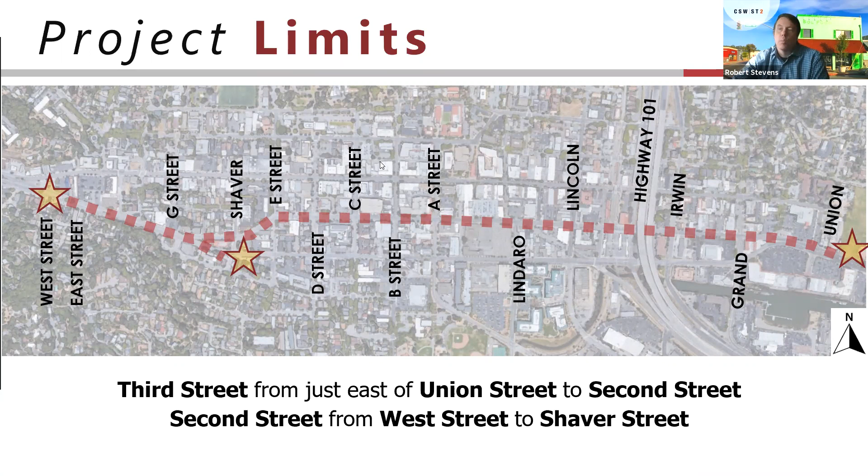So as Lauren and April have mentioned, this couldn't have been possible without a really great community collaborative effort, which the team has been working with stakeholders on since July of 2017. A couple key facets of this was that there was a feasibility report presented to City Council in June of 2019, and City Council provided feedback allowing us to move forward into the final design phase. We had a great presentation last November, and then we had a few updates to the BPAC in December and February that really helped us refine those plans. We'll be going through some of those details tonight.

So this project's goals - as many of you know, this is a basic infrastructure project. We're rehabilitating pavement, updating traffic signals, repairing accessible ramps. But where we can, we're really improving access and safety for cyclists and pedestrians. There's nothing in the project that hampers any flow for vehicles, transit, or emergency services. We're also enhancing the street trees, the tree canopy along the corridor, and where possible, improving safe routes to school. I think the key point behind this is we're creating an economically viable project - we're building something that we have funds to complete.

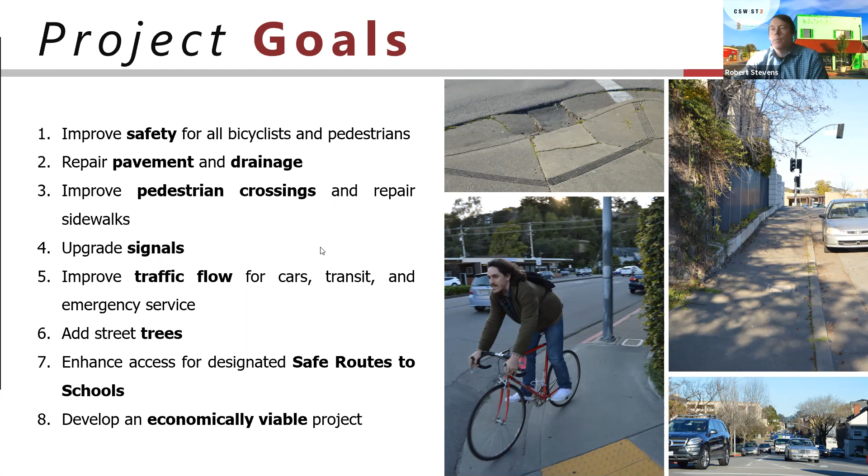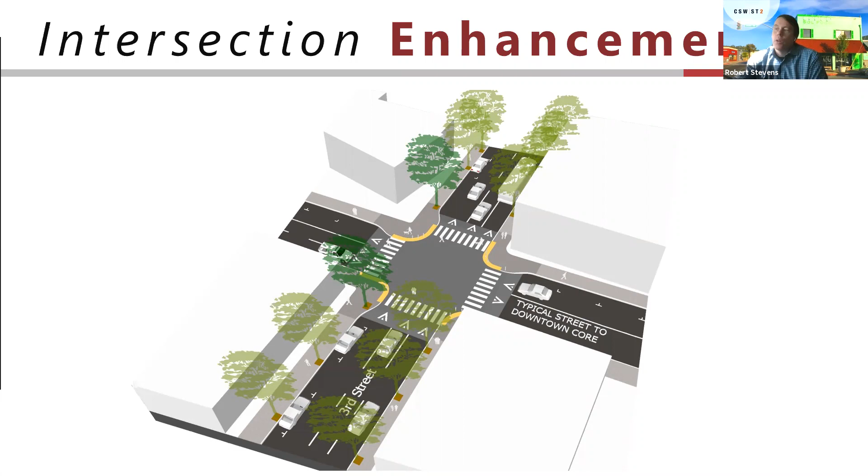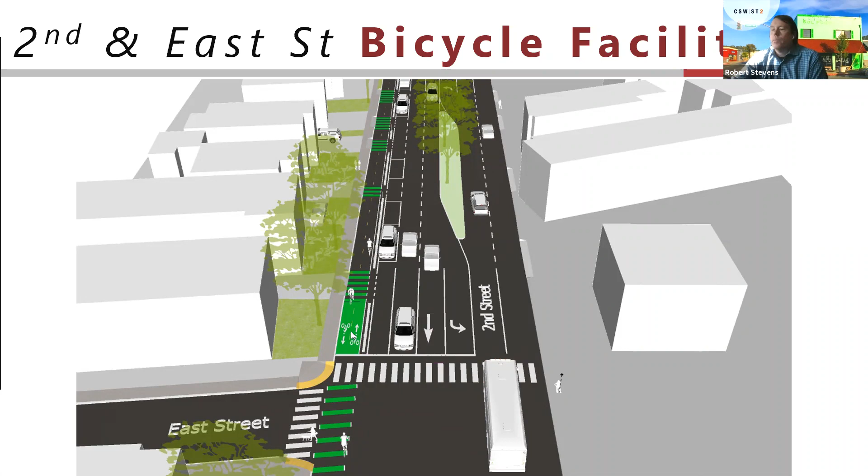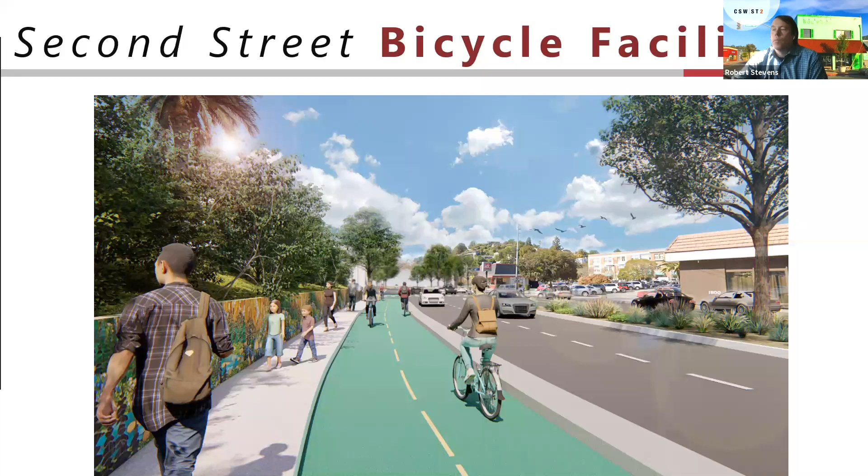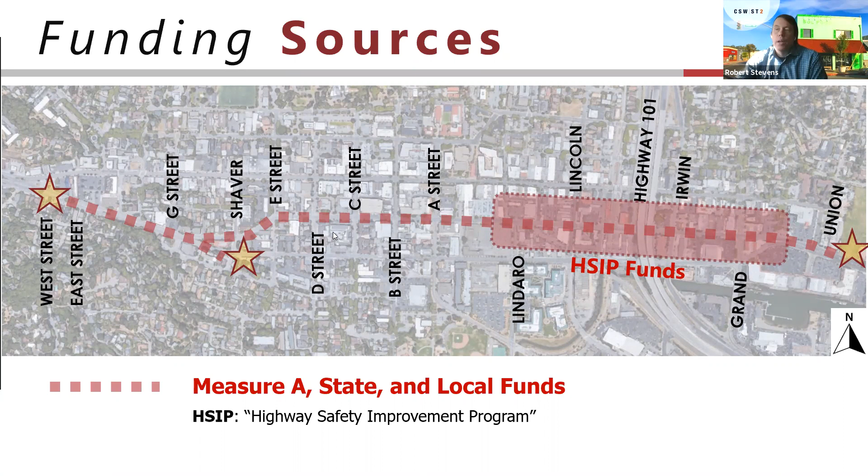So funding for a complex project like this comes from many, many sources. One, and probably the most important, is the Measure A funds, or the gas tax money. That funds most of the paving and street improvements along the corridor. We're also fortunate to have state as well as City of San Rafael funds that help augment these improvements. And another key important component is the HSIP fund, which is the Highway Safety Improvement Program, which really promotes safety of crossings in the red boxed area here from Lindaro to Grand Street. This is a federal funding source that the city was awarded through a competitive grant program.

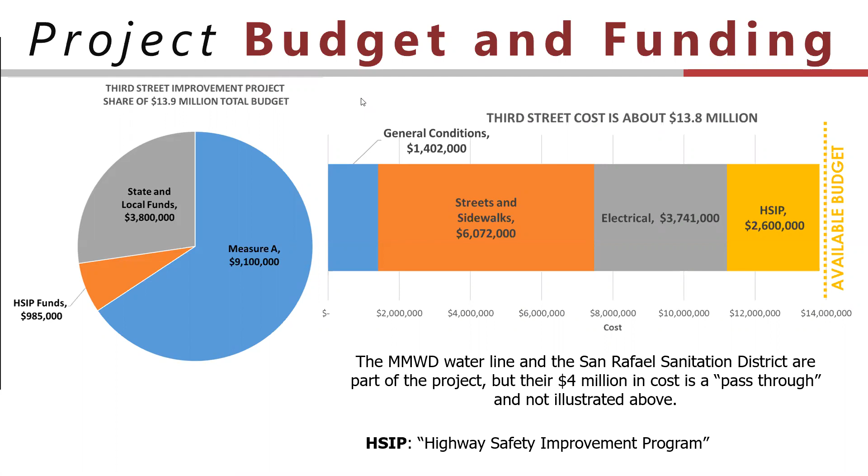Just to comment about the trees, there's a robust series of street trees that are perfect for an urban environment and perfect for San Rafael's habitat. Have a look at the city's website—all the tree species are depicted online.

No other questions. Sounds like everybody's an expert.

Thank you all. So let's move on to some of the updates, some of the work we've been doing since we last met in November.

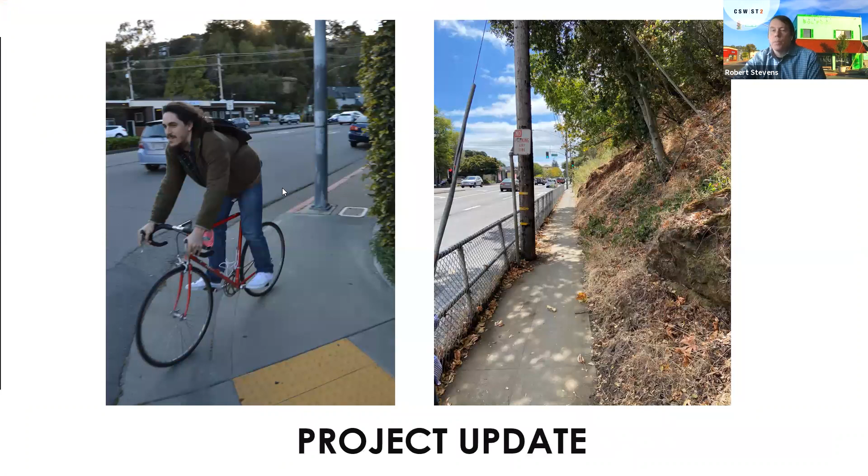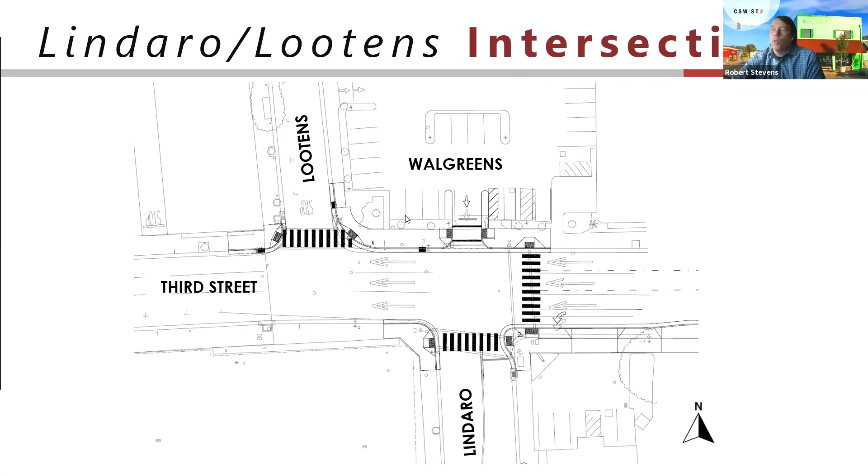We've also done some additional work regarding basic infrastructure along the corridor. Many of you might not know there's a giant culvert that goes underneath 2nd Street, just west of Shaver. We spent some time down in there in the early morning hours of February and found some areas that needed repairs, and the city's going to make those repairs to keep this culvert working for the next 100 years.

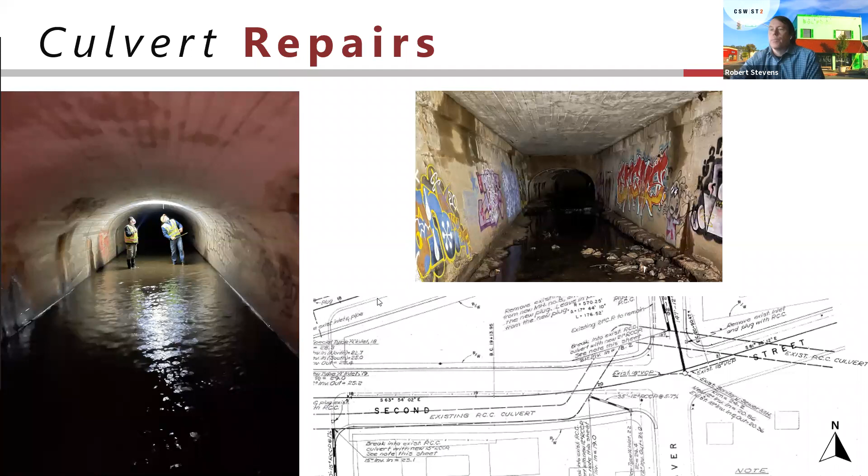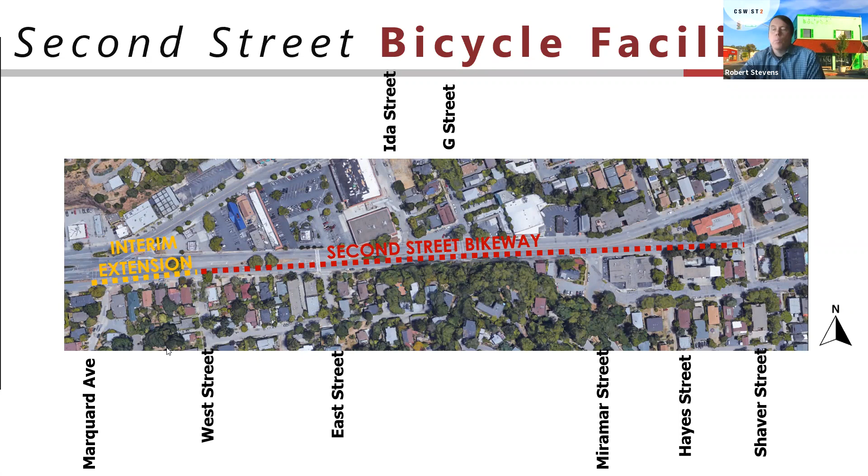Again, we've heard the concern about extending the 2nd Street bikeway from West Street to West End Avenue. This yellow area is an interim extension. As many of you have heard, the city has a future project that will modify the 2nd and 4th Street intersection, but until that project can be planned and funds aligned, we've come up with a potential solution to extend the bikeway to West End. Here's an example of it.

Cyclists heading in the westbound direction would also have an exclusive protected lane to progress through the intersection. But just like today, vehicles would not be allowed to travel north on Marquard onto 2nd Street; they would still be allowed to turn left from 2nd Street onto Marquard. This option allows for any future modifications contemplated for the 2nd and 4th Street intersection and preserves the investment made by these improvements.

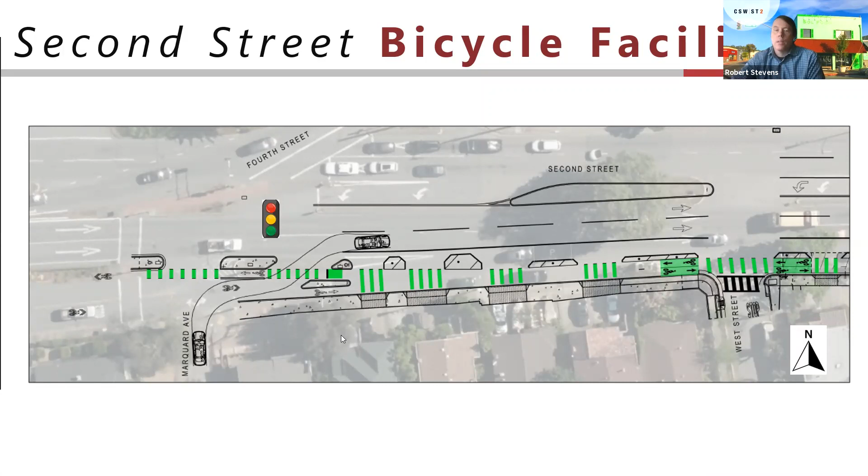So as we are improving and increasing bike service along 2nd Street, we want to make it safe for cyclists as they're traveling at night. And as we know, along this section of 2nd Street, there are a lot of driveways, and driveways and bikes at night could represent a conflict if there's not proper lighting.

So the project is proposing to add pedestrian scale lighting to improve lighting of the bikeway, as well as to provide enhanced lighting at the intersections for pedestrian safety.

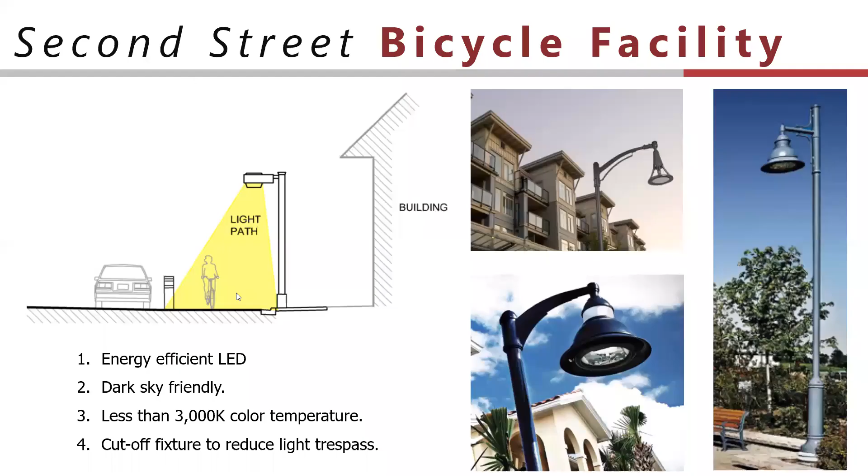There is a really magnificent London plane tree in the median between West Street and Marquard. And I would like to request that you guys look very closely at the changes to the median curb and see if you can't leave those alone or adjust them so that the full existing root zone of that tree is protected. It really should be preserved. And it looks like you're inches away from being able to hold on to that really valuable asset. So thank you for that.

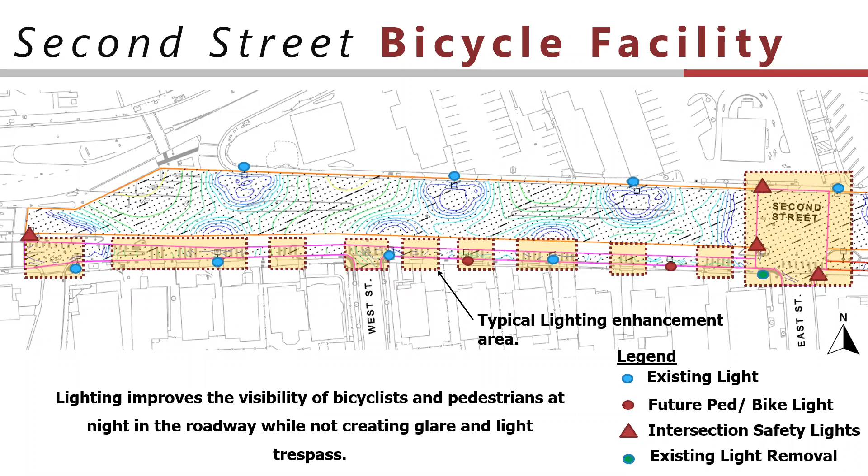And I'd also like to recommend, to Amy's point, that you add 2 species to the palette of trees for the corridor. They're both used out there already, either in existing or proposed developments - London plane trees, creating exactly the kind of canopy and impact she was referring to, and another one called Armstrong maples. The existing palette is fairly small trees, and we need some big ones to really carry a street of this scale.

And then thirdly, I want to note that the original proposal here, and what's called for in the bicycle and pedestrian master plan, was for a multi-use path. I understand, I think, why there's a drift towards isolated bicycle facilities, but I really want to raise the banner for multi-use paths as we have along the SMART right-of-way and elsewhere in the city.

I think those are much preferable from a pedestrian standpoint. It's much more gracious and also provides a greater opportunity for street trees.

And then going to Lindaro and 3rd for a second, I would advocate strongly to add a crosswalk on the west side of the intersection of Lindaro and 3rd. Otherwise, you're forcing pedestrians walking along the west side to cross two streets to get to one place, which is downtown. I understand the traffic flow there is not optimal, but make it safe.

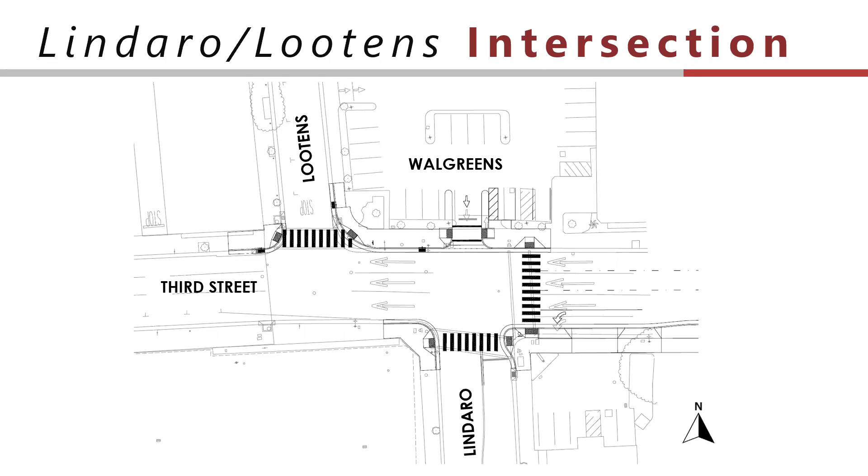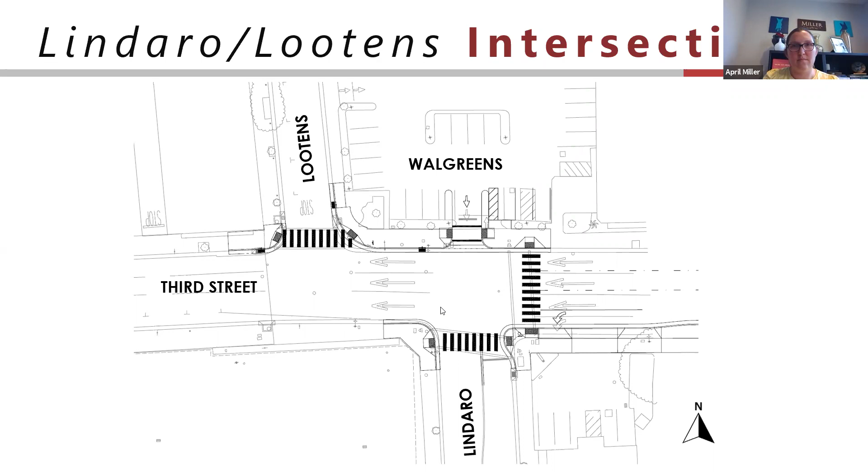Hi, thank you. I just wanted to piggyback off what Bill Carney was just saying. I hope that somehow the DPW and the planning teams are working together to help better pedestrian safety down at the Lootens and Lindaro, I guess I'd call it the complex.

I want to thank you guys so much for re-examining that driveway and coming up with the exit-only plan. We still have so many questions that have been unaddressed about how we're going to handle the pedestrian flow on Lootens. Although it creates more safety at the Lindaro and 3rd Street driveway, it also creates more danger for pedestrians on Lootens by forcing more cars onto Lootens.

It's already a heavily pedestrian area, identified by the General Plan 2040 as a primary pedestrian spoke. We have the BioMarin project, and potentially that other private project across that might incorporate what is now public parking to become apartments while still maintaining 171 parking spots. So it's a very heavily pedestrian area.

I just want to reiterate a request for looking at crosswalks and what are we going to do to make it safer for pedestrians. Thank you.

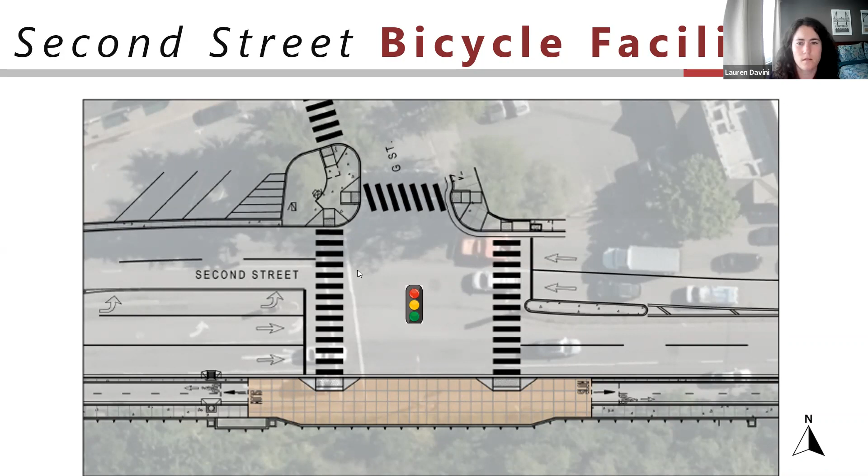Okay, I don't see anyone else with their hand raised, so let's move to the next section.

So we're going to talk about the fun part now, we get to build this great project. I think all of us know, having lived through a construction zone, it can be a little disruptive if not properly planned. But we in the city are working hard on a process to get this project completed as efficiently as possible and minimize disruption for stakeholders, residents, and businesses along the corridor.

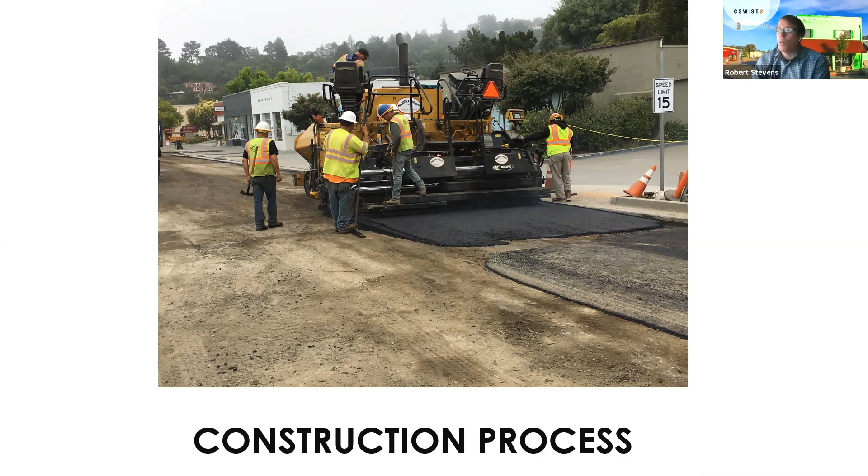So we've developed a series of thoughts about how this could be approached. Based on the scope and scale of the work, we believe this is going to take about a year to complete, and we need to complete it in a logical sequence.

The first part would be the utilities doing their work. Marin Municipal Water District and the Sewer District, as well as PG&E, would make infrastructure upgrades.

We would then come in and do sidewalks and curb ramps at the intersections of A, B, C, D to downtown, as well as work on our Second Street bikeway and all the enhancements needed there. While doing our sidewalk and curb ramps, we would also be doing our traffic signals.

And then once we have all of our hardscape and signals in place, we would commence with the paving improvements, do the striping, and then install our street trees.

In order to accommodate this work, there's going to need to be lane closures, because there's just not physically enough room to do all this stuff and allow workers to work safely without closing a lane.

Recognizing the current travel patterns eastbound, typically along Second Street, lane closures would be allowed during off-peak periods from 9 a.m. to 6 p.m. In the westbound direction, lane closures would be allowed from 6 a.m. to 3 p.m.

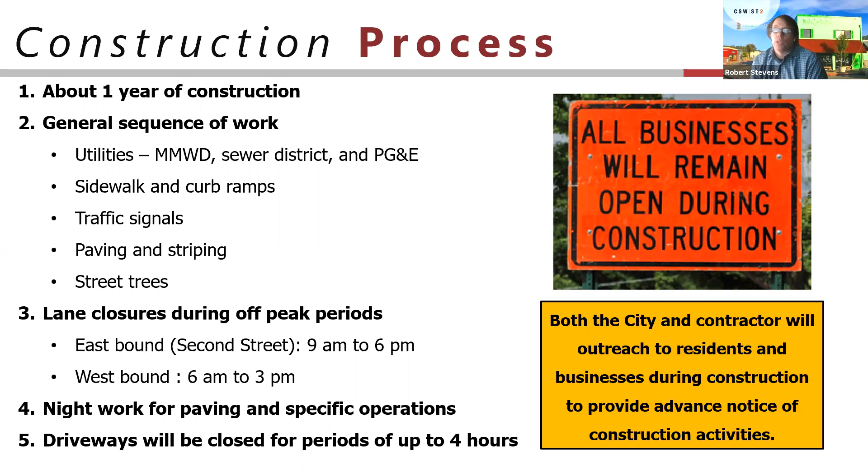So with that, does anybody have any questions related to how we're planning on doing the construction? I don't see any hands up. Give folks a minute to raise hands.